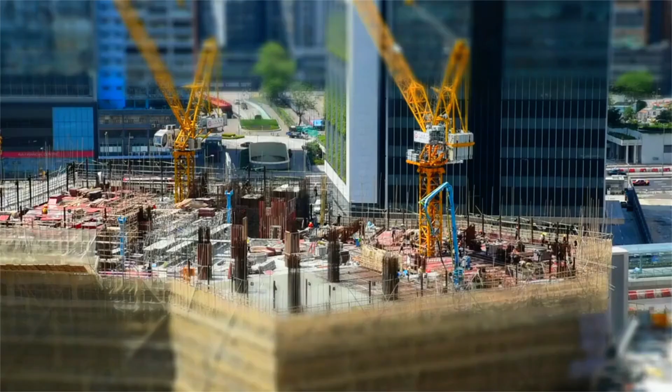Architecture has often been described as frozen music, a silent symphony built in steel, stone, and glass. Every line, every shadow, every open space, it all begins with the question of what if. We build to shelter, to inspire, to defy gravity, and ultimately, we build to remember.

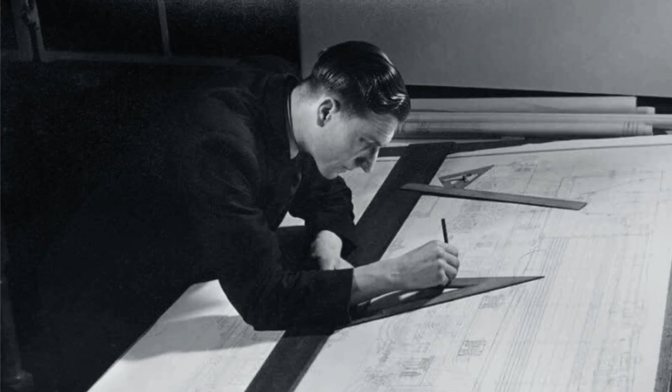Behind every structure, there's a story of minds racing against deadlines, of sketches erased and drawn again, of architects who see what isn't there yet. Architects have left their mark in the cathedrals of old, the towers of ambition, and the homes of quiet dreams.

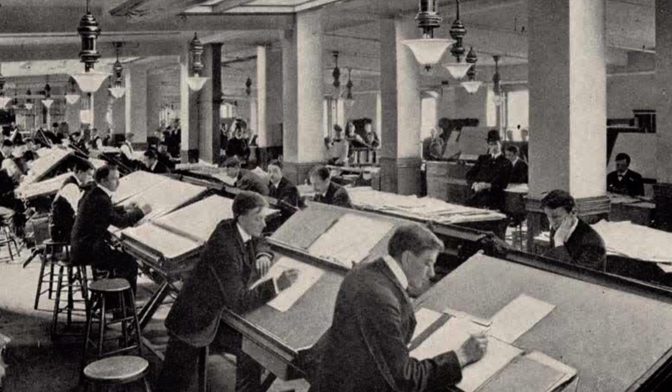Over the years, architecture has evolved. At first, there was the architect's hand. Every line, a decision. Every drawing, a story. Architecture was built on patience and precision.

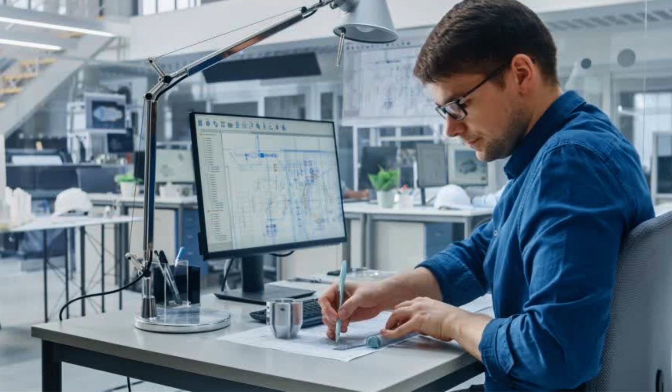But today, the tools are changing. Artificial intelligence is now impacting the architectural profession and offering new tools to architects. It is a new and exciting time. Designing tomorrow, architecture and AI.

For architects, designing projects was a slow, methodical process, requiring vast amounts of drawings in coordination with engineers. When drawings required changes, as they often did, these also extended design time. However, this would soon change in the 1970s with the advent of computers.

It was 1977. Jimmy Carter was president. The movie Star Wars debuted in theaters, and personal computers like the Apple II were selling very well with the public. This set the stage for a revolutionary design technology for architects. At that time, computer programs were stored on 8-inch external floppy disks with a 500 kilobyte storage capacity.

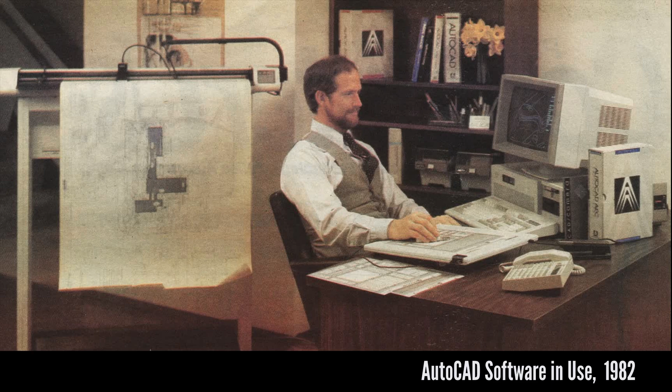Then, in 1982, a landmark software, AutoCAD, became available to architects. For the first time, architects had computers in their offices and could now draw building designs on the computer. This made drawings more precise and reduced the time needed for revisions. A company named IBM made the first computers capable of running the software.

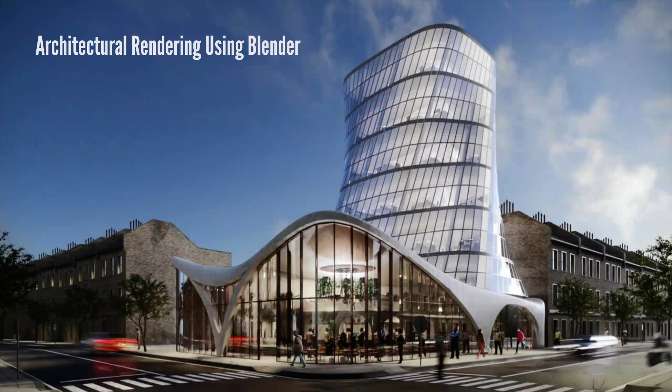3D modeling was the next major change, which came in the early 2000s and was mainly used in the gaming and TV industry, but expanded into architecture. This gave architects new tools for client presentations. Computer programs like Maya, Blender, and 3ds Max gave architects amazing new tools to present their ideas. Today, 3D software programs create visuals of such high quality they can be hardly distinguished from real photos.

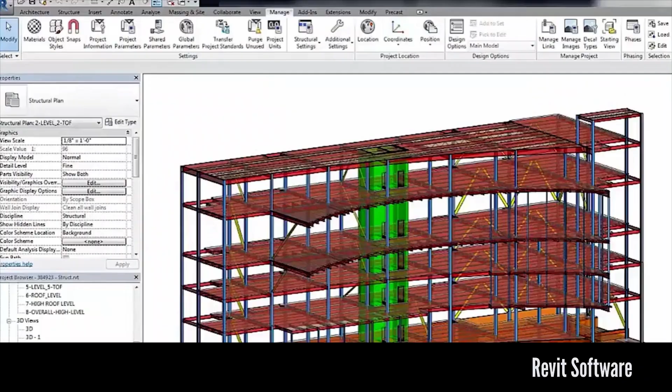The early 2000s also brought a program named Autodesk Revit to architects. They could now create an intelligent 3D model of their project. This new type of model had embedded information such as the total amounts of different building materials, making cost estimating much more accurate. Engineers could also create separate 3D models of the structural, mechanical, plumbing, and electrical systems of the building for more precise coordination of how each system fit in the building.

The next major milestone was the emergence of AI. Artificial intelligence entered the architectural realm when computer algorithms began learning from massive data sets of design cases, performance data, and user behavior. A program called Autodesk Forma became available in the year 2023 and uses artificial intelligence to assist architects by optimizing their designs for solar, wind, and energy efficiency and predict construction costs and environmental impact.

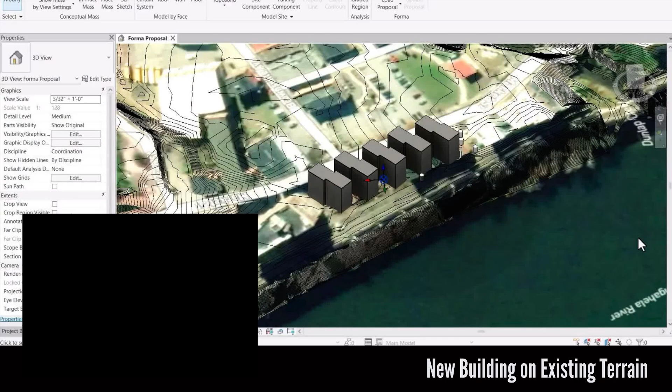With Autodesk Forma, architects choose a building site from Forma's database, which includes fully 3D modeled existing contours, roadways, and adjacent buildings. Once the site is chosen, architects can quickly model concepts of a building as it sits on a site and then explore different building heights.

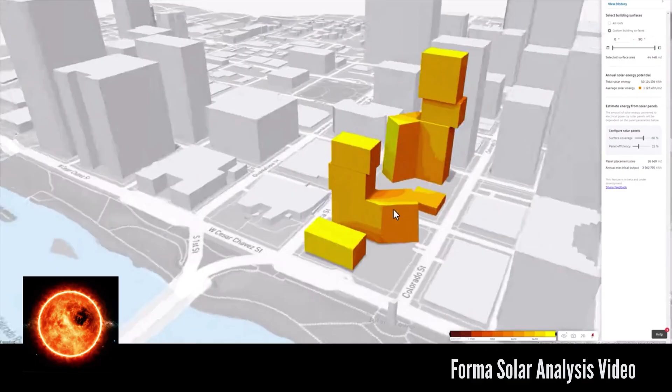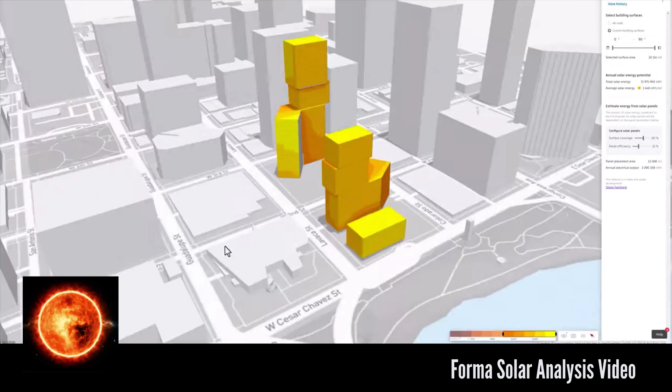Forma can then use AI to calculate a solar analysis for the building showing the sun's trajectory based on the building's geographic location and illustrate how much sunlight will hit the building surfaces or outdoor spaces throughout the year. It can estimate daylight exposure inside buildings or in courtyards, helping optimize natural lighting and reducing energy use, and helping architects identify dark zones so that daylight can be brought to those spaces.

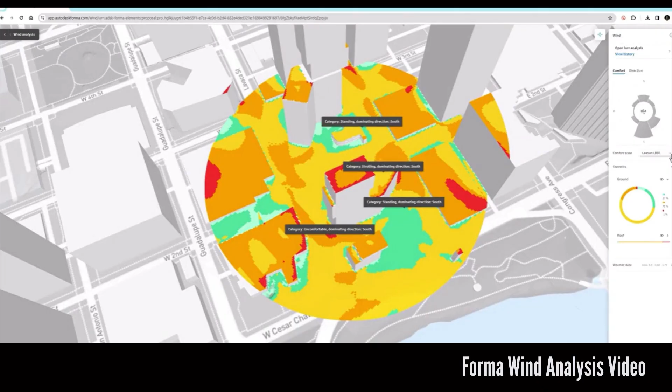It can also identify which building surfaces will need shade. Wind analysis: Forma creates an AI-based wind analysis which examines the building site for human comfort based on different activities. It also looks at wind direction at the site. If the architect decides to change the building design, then the analysis is updated in real time. Forma breaks down areas where wind conditions are most comfortable and those which are least comfortable to pedestrians, and can also calculate the wind speed at the building site for safety and comfort.

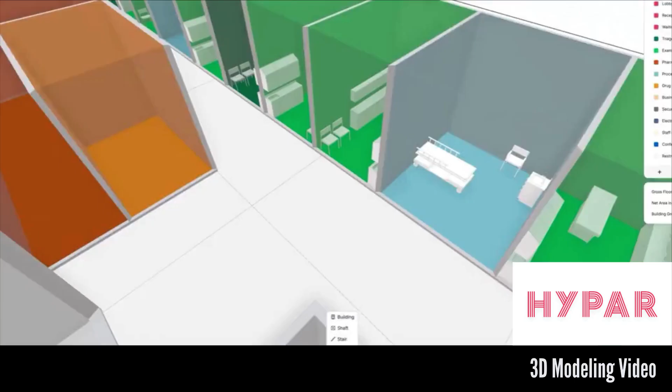Another AI software introduced in 2024 is Hypar. It's been described as BIM 3.0 because it lets architects create intelligent 3D models simply and intuitively. Elements such as columns, walls, furniture, windows, and doors automatically move and stretch as changes to each space are made. This video explains how easy Hypar is for architects to use.

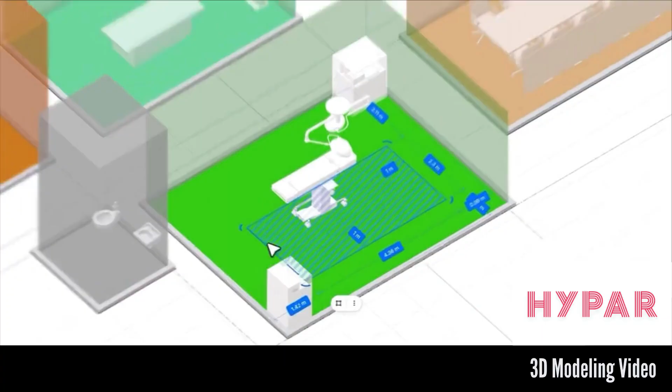First, open Hypar and start by adding a room space. Then move points in the room by dragging the edges of the walls to different lengths and widths until the room is configured as you like. Adjusting the room with Hypar is easy and intuitive.

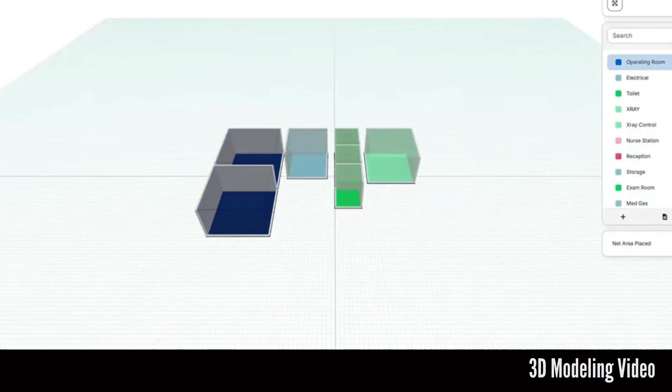Then you can enter the different space requirements for each room in the building, and Hypar will automatically create three-dimensional room blocks from your requirements. Room sizes change instantly with Hypar.

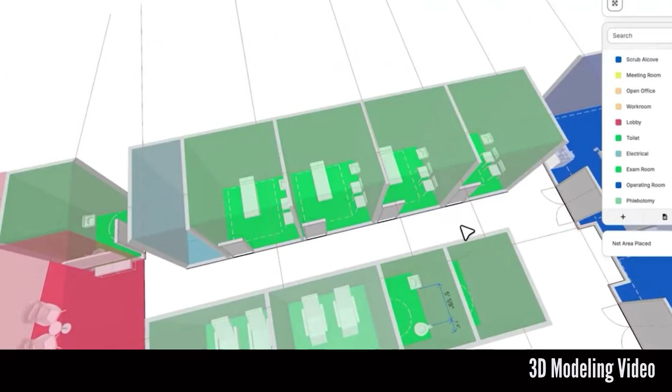You can also enter 2D drawing underlays to start laying out 3D rooms. Intuitive movements and smart snapping in Hypar let you lay out your spaces easily and accurately. You can jumpstart your room layouts with 3D furniture layouts, as well as putting doors to each room. If a door conflicts with furniture space requirements, it will turn red, so you can relocate the door.

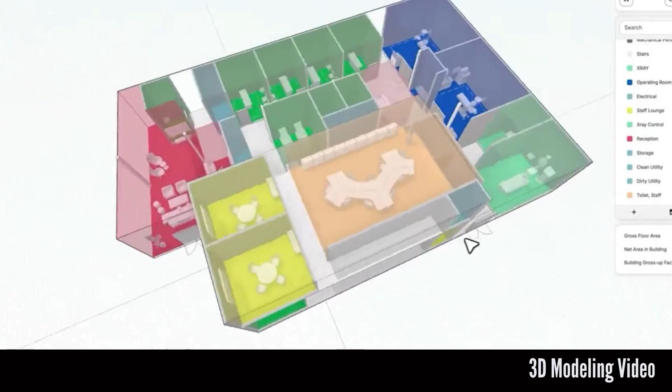You can also change the height of your first and second floor instantly, and create options on the fly to easily explore how your 3D floor plan changes as room sizes change. This lets you explore different floor plan layouts.

The next AI technological breakthrough is called Midjourney, an AI visualization tool. Architects are using this tool for visualizing their design ideas. By typing in text prompts, architects can create conceptual renderings of buildings and interiors. They use this for early concept development without having to create detailed 3D models.

Essentially, it turns text prompts into powerful visuals. Since Midjourney relies on how clearly and strategically you describe your ideas in text, architects are investing in learning how to effectively write prompts as a valuable design skill.

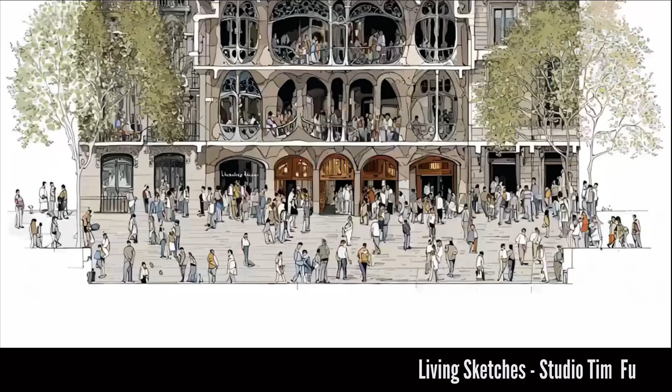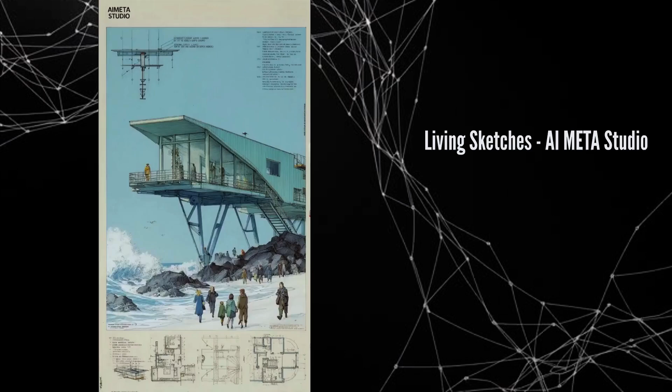Our final technology brings us to architects like Studio Tim Fu and AI Meta, who are using artificial intelligence to animate their architectural sketches as tools for early design. These sketches can be shown to clients for discussions on client desires. AI-augmented animated sketches let concepts breathe, evolve, and stay flexible. Using Midjourney, Kling, Leonardo AI, and ChatGPT, architects can gain collaborative feedback from the team and client.

Tim Fu discusses the importance of architects embracing AI as a design tool.

We're standing here at a kind of historical moment right before the revolution really takes off, so we're only getting the beginning taste of it. And the fact is you do have to adapt, because technology has never really been forgiving for people that don't innovate. I always think back to when there were architecture professors and architects that were against CAD software. How much they survived post-CAD, it's definitely going to be, if not more so, cataclysmic than that revolution. AI is just like the bullet train, it didn't wait for us. And if you're not adopting it, it's going to be an issue.

Innovation is the bridge between what exists and what is possible. And with so many technological breakthroughs available today, it's exciting to think of what the future holds. With AI as our partner, design can be a collaboration between human and machine. AI doesn't replace the architect's vision, it expands it, challenges it, redefines what's possible. The cities we build tomorrow will not just be smarter, they'll be more human, because we learn to design with intelligence, empathy, and purpose intertwined.